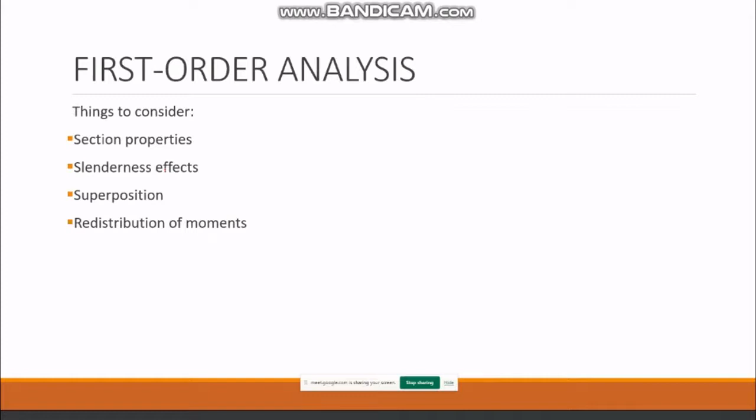We have okay, sama na itong target. Okay, so ayan, so last time... Okay, stop ko muna ako presentation.

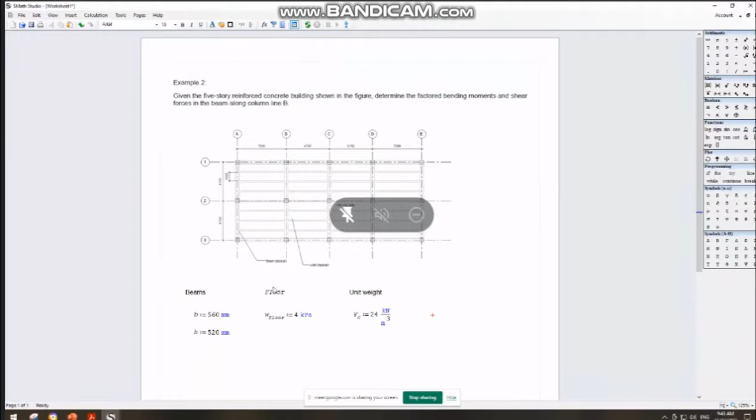So our beams are 560 by 520. While ang atong floor, ang atong kinahanglan information is actually the weight of the floor, which is 4 kPa. So ito yung kailangan natin. Okay, so then we are using normal weight concrete nga 24 kilonewton per cubic meter. So we are to determine the factor bending moments and shear forces in the beam along column B. So take note, kini lang atong kina-consider.

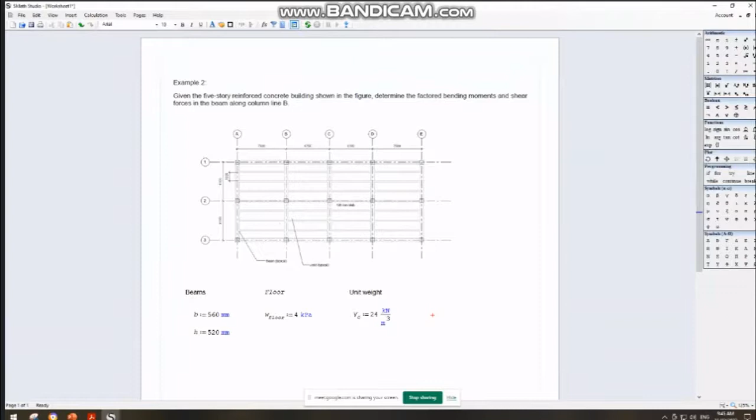Okay, sige. So let's start with our solution. So usually pag ganito, pag simple lang, we can expect that the dead loads and live loads is uniform all throughout the span. Uniform talaga ni siya.

So the tributary width is supported by the beams along line B. Equal to 1/2 of the transverse span in either side of the column. So 1/2. So dire 1/2 ani and 1/2 ani. So in other words, there is atong slide, ang atong tributary area is...

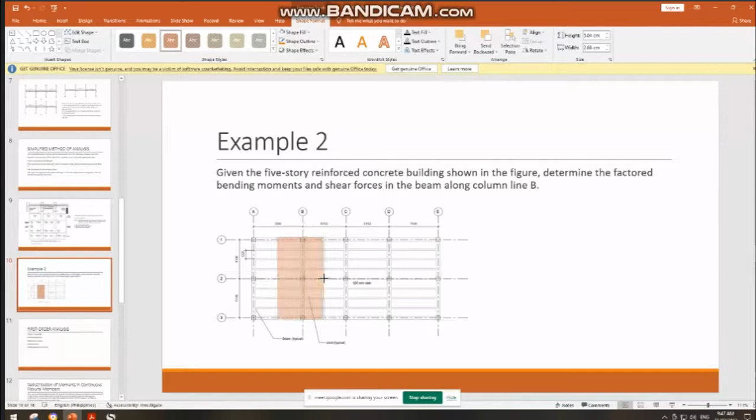Let's say shape. Ang tributary area ni mo ingon. Let's say transparent na ta. Ito yung tributary area nimo. So this side here, 7,600 divided by 2. There, this is 6,700 divided by 2. So ang tibok ani nga length would be 7,600 divided by 2 plus 6,700 divided by 2. So that would be our, so 1/2 ani dire, then 1/2 dire. So let's compute.

Ang atong first method is we have to calculate the tributary area. So calculate kita sa tributary area. Calculate... so inside of tributary area, usually pag beam, tributary width lang. So tributary width. So again, 1/2 ani is 7,600 or 7.6 meter. Then this one is 6.7.

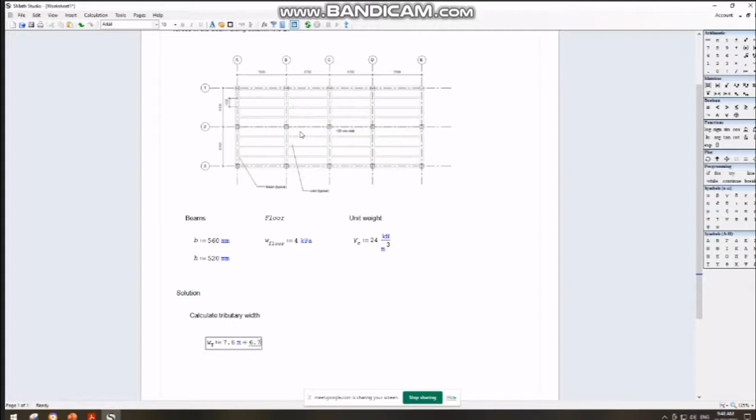Okay, 1/2 ani. Then 1/2 ani. So 7,600 divided by 2 plus 6,700 divided by 2. Or that would be, let's say, tributary width. Let's say I'm using WT for my tributary width. So that would be, ang first pa natin, 7,600 or 7.6 meters. And plus 6,700 will be 6.7 meters. Tapos, i-divide na natin sila tanan by 2. Oh, by 2, then that would be, okay, we have 7.15 meters. Okay, so we have already determined the tributary width.

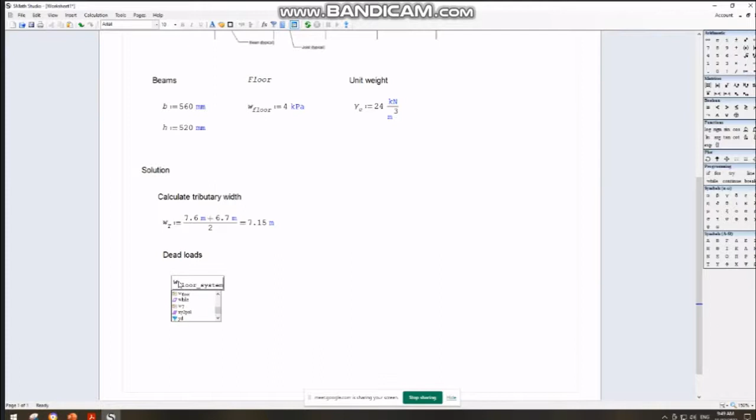So the next step, we can now calculate the dead load. So calculate the dead loads. Okay, so first, consider natin ang atong weight of joist. Okay, so let's say na lang W, let's say joist. This is actually including na yung so let's say weight of floor na lang, floor system. That's combination of the combination of your joist as well as your slab, no? That will be equivalent to the weight of the floor.

So in combination now, joist, the weight of the joist as well as the slab, that would be the weight of floor, 4 kPa multiplied by the tributary width, 7.15, WT. That will give us the weight of the floor system in terms of kilonewton per meter, per meter length. Usually pag beam, we express that one in per meter length. So i-convert ko lang niya to kilonewton per meter. We have 28.6 para sa atong weight of the floor system in kilonewton per meter.

Next, so floor system na lang ni. Floor system, let's say floor system, it consists of joist and slab. Next, we have the beams. Beam pa.

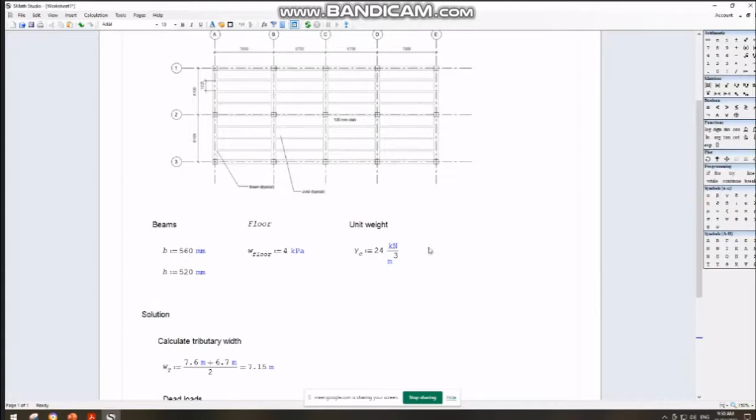So for beams, again, we're not given the weight of the beam, but instead we're given the dimension, and we know that our beam uses a unit weight of 24 kilonewton per cubic meter. So to determine the weight of the beam, let's call it W beam. That would be the unit weight of concrete, 24 per cubic meter, multiplied by the dimension, which is B times H.

The cross section B. And to get the same rate in kilonewton per meter, we have to convert this. So we have 6.988 kilonewton per meter.

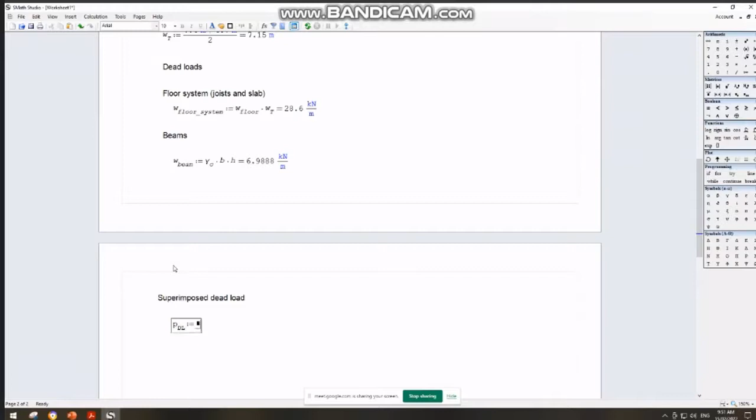The pressure for the superimposed dead load is called PDL, pressure and superimposed dead load, that is 0.5 kPa.

So we also call this W SDL, superimposed dead load. That would be equivalent to the pressure for superimposed dead load in kilopascal times the tributary width, converted to kilonewton per meter so they're all consistent.

So now we have the superimposed dead load in kilonewton per meter, and therefore we can compute the total dead load. Usually the total dead load is just WDL. That would be equivalent to our weight of floor system, plus our weight of beam, plus our weight of superimposed dead load.

That means it's equivalent to 28.6 plus 6.998, plus 3.57. So we can just compute that directly. So we have the value in kilonewton per meter. So for our dead load, our total dead load is 39.1638 kilonewton per meter.

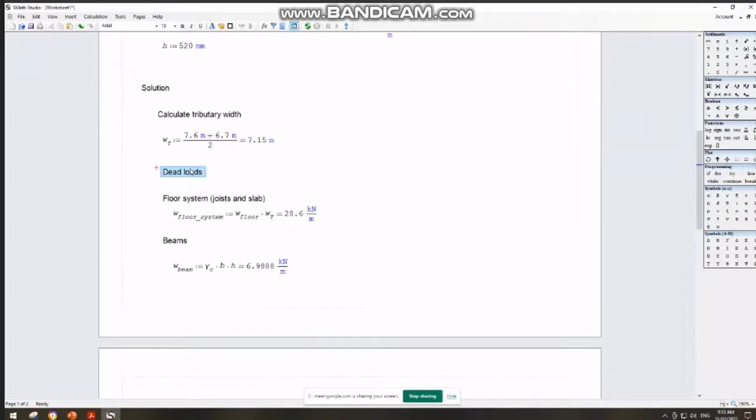Next, let's compute our live load. We're done with the dead load, now let's do the live load. What do we need the live load for? Of course, so we can compute WU, which is a requirement later on.

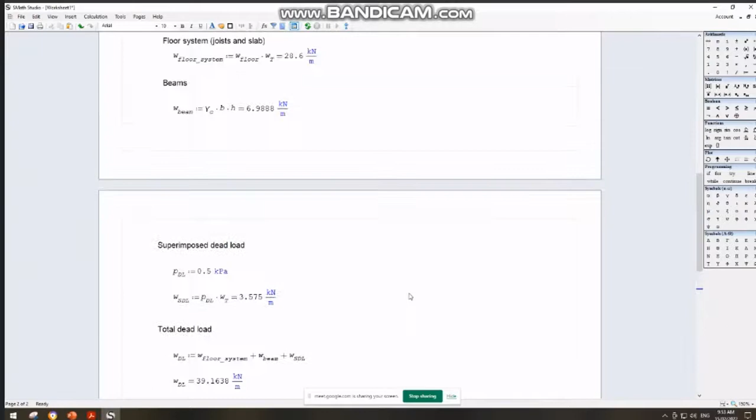Since it's a floor, and a typical floor, we have to apply the live load reduction. So, reduce live load, or apply live load reduction.

So for floors, the formula we use is on our slide, which is equivalent to L. We have L sub O, the nominal live load found in the code. So we'll be using the metric formula, 4.57 divided by the square root of KLL times the tributary area.

Now according to the code, in our previous example, our value for KLL is 4. This time, since it's different, the value would be KLL is equal to 2. So that's the value for beams.

Next, let's calculate this one. For office use, based on our previous example, for office this is equivalent to 2.9 kPa. This is found in the code, coming from NSCP 2015.

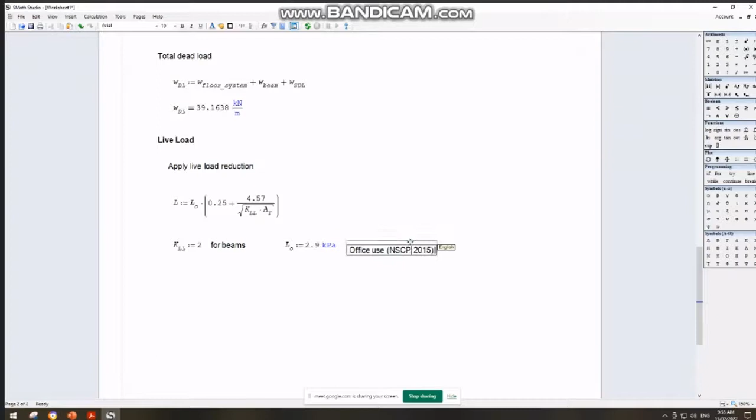Next, we need to compute our A sub T, which should have no unit. So again, since our tributary width, let's go back here.

Our tributary width is 7.15. Considering the span, same as the other, this length which is 7.15 times this length of 6.1 would give us the tributary area. So for the beam, for one beam, we get the tributary area first, width times the height. So this one is 7.15 total, times 6.1.

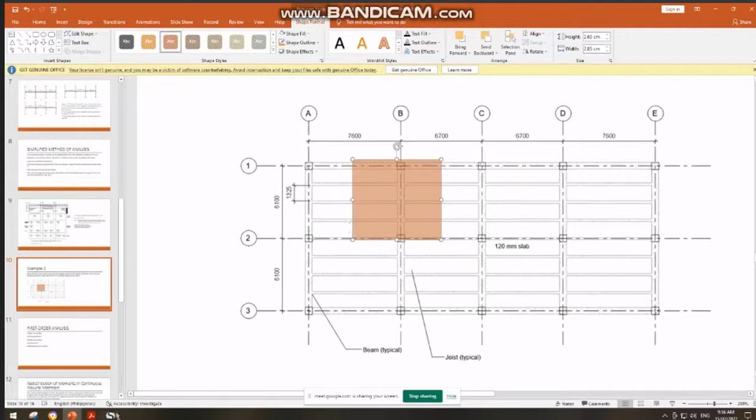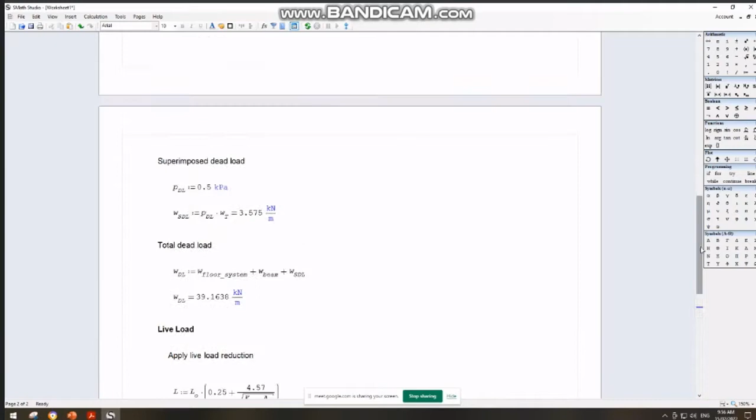A sub T is equivalent to our tributary width times this value. We don't use WT because it has a unit, and our formula requires no unit. So we just use the value, which is 7.15 times 6.1, removing the unit so the formula and the answer are consistent.

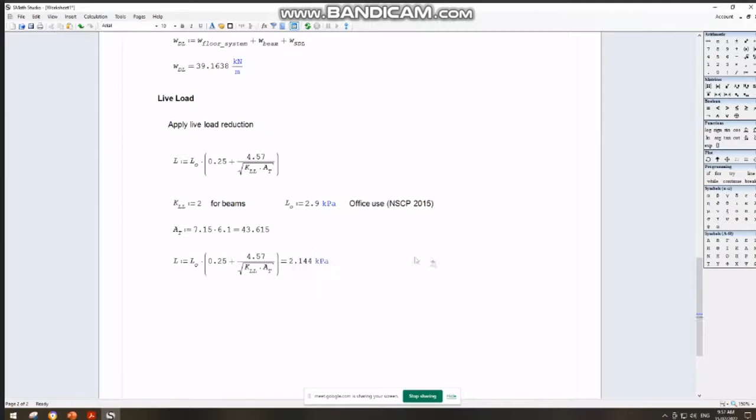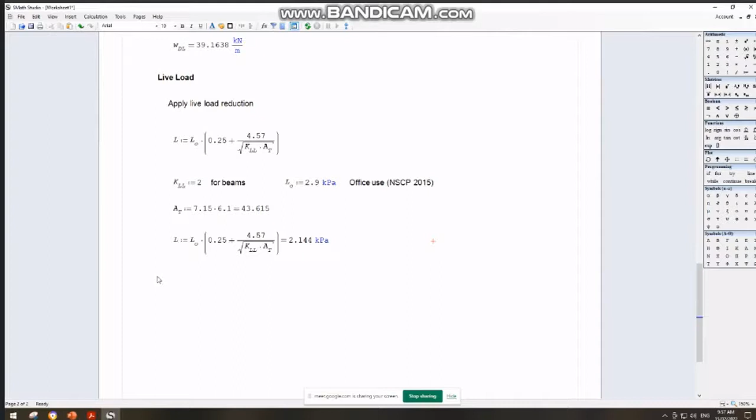So let's compute. We have it in Pascal, let's convert to kilopascal. We get 2.144. But there's also a consideration in our code: if it's supporting 2 floors, use 0.4, and if supporting 1 floor, use 0.5. So let's call this one L1, and we have to compare it with L2. If supporting one floor, our code condition is 50%, so we have 0.5 times L sub O.

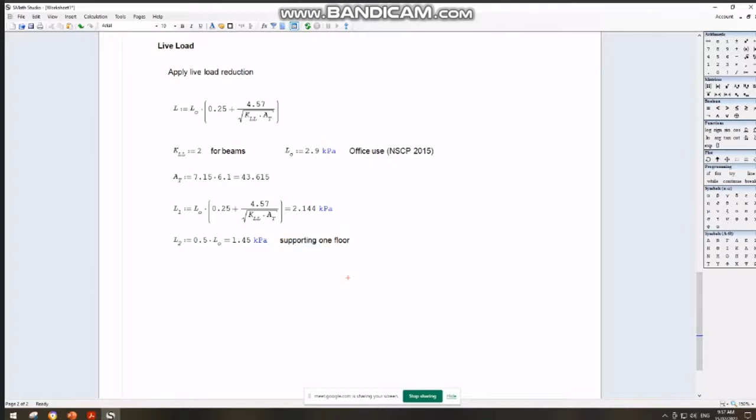kPa, right? This is supporting one floor, no? So I'll assign it as whichever is smaller, okay, whichever is larger among these.

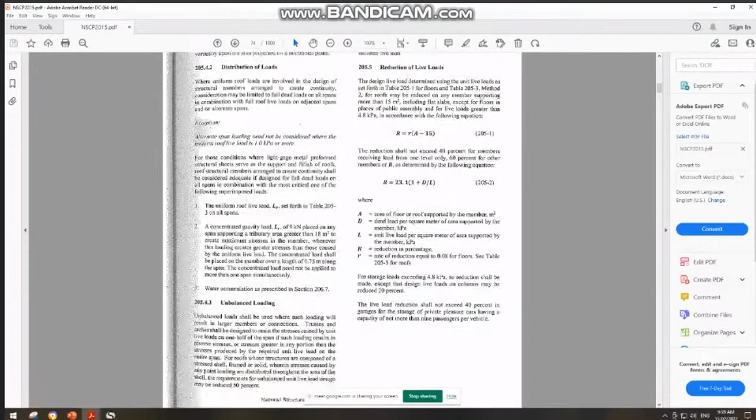Let's go to the code, NSCP. Okay, so we have here the code. Let's find the provision, around here... 40.

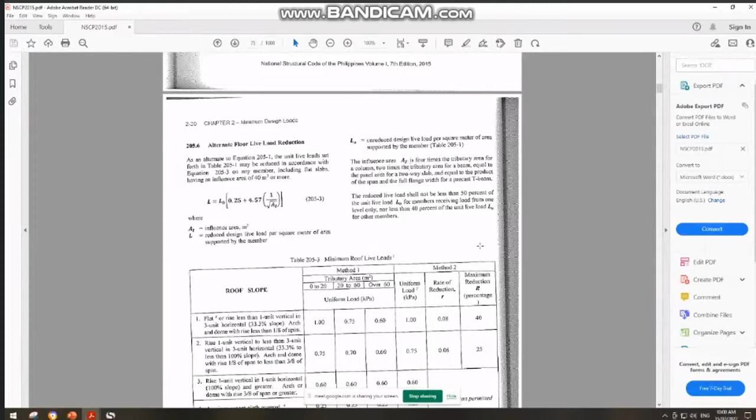Okay, this one: the reduced live load shall not be less than 50% of the unit live load for members receiving load from one level only, nor less than 40%. In other words, whichever is larger. So it should not be less than 50%. Since this one is larger, then we'll be using L1 as our L.

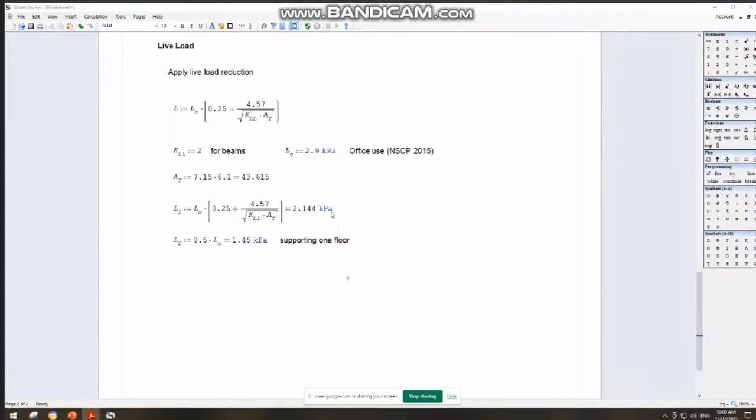Okay, so this would be the reduced live load. Or you can use the program for this. Let's say our reduced live load is equivalent to, using this command: if L1 is less than L2, whichever is larger, then L equals L2, else L equals L1. Since our L1 is greater than L2, our L here would be 2.144.

Okay, so this would be our reduced live load. Of course, we need to include also the partition load, movable partition. We cannot really, usually for offices we have cubicles, right? We put in cubicles, but they are not permanent, they are movable, so we have to include movable partition load.

Usually, what's used for this, according to the code, is 1 kPa. According to the code, for movable partition, we have to use a value of 1 kPa. So therefore, our live load now would be the reduced live load plus 1 kPa for the movable partition, then you have to multiply that with the tributary width.

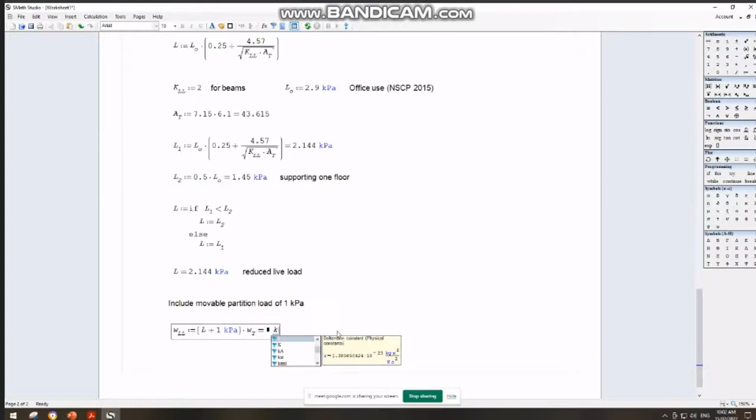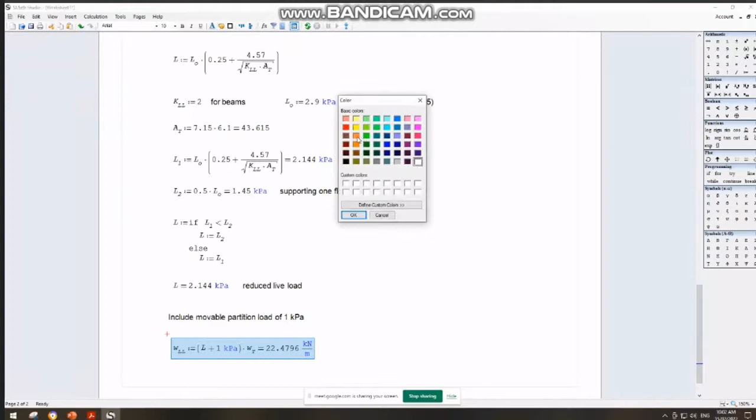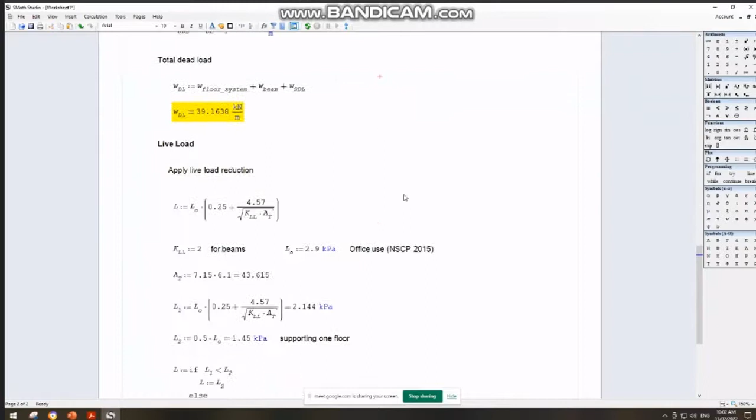Okay, you have now the live load in kilonewton per meter. So we now have the live load and we also have the dead load. These are the important values we'll be using later on. Next, having determined now the dead load and the live load,

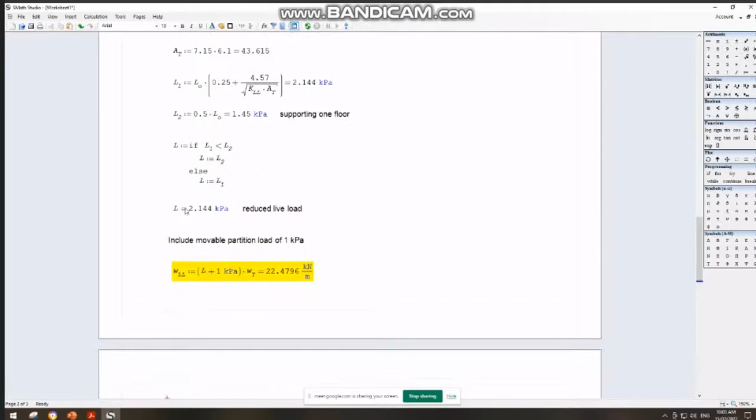so now that we've determined these, the next step is we are going to verify whether we can apply the simplified method. Can we apply it? That would be our... so it's a long process, as you can see, we haven't even started yet. We just computed the dead and live load.

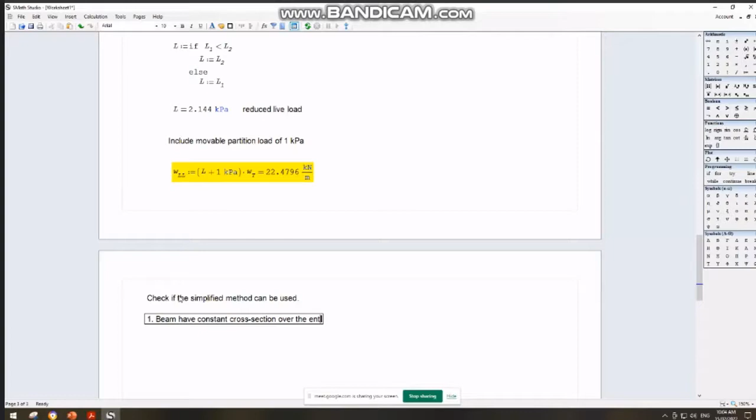members are prismatic, they have uniform cross section. So since our beam is rectangular and constant, then it's okay. Beam have constant cross section over the entire length. Actually, the length of our beam here is 560 by 520, so our beam is 560 by 520, so it's constant.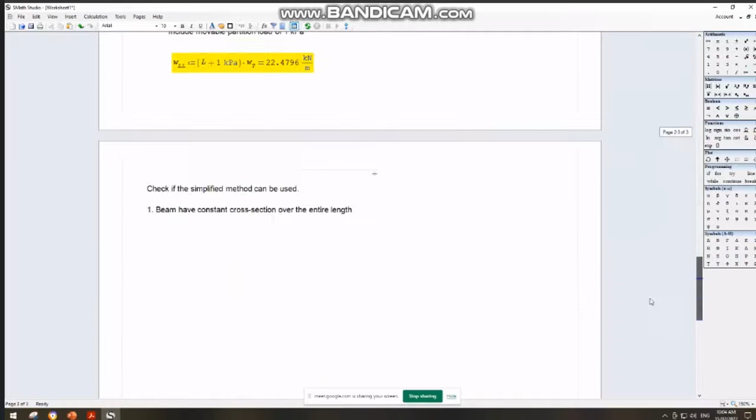Number 2, our load is uniformly distributed, rectangular, so it's okay. So for number 2, our loads are uniformly distributed, rectangular load. Okay, one-way slab. For two-way, it's trapezoidal, but this one is one-way slab, so loads are uniformly distributed.

Then number 3, another reason we computed this. The number 3 requirement is the unfactored service live load does not exceed 3 times the unfactored service dead load. So for that reason, compute the unfactored live load, LL.

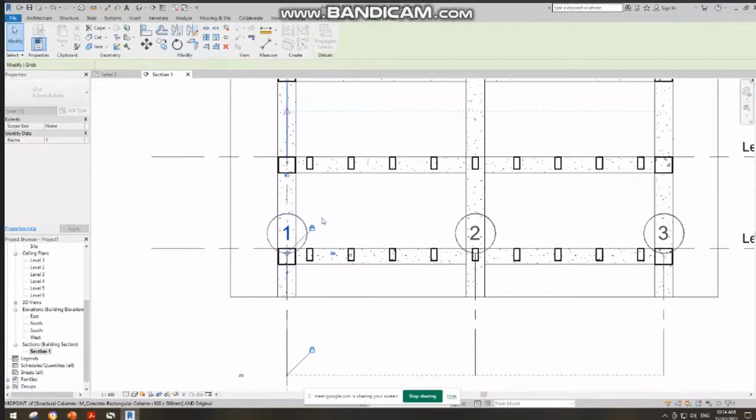Loading up computer.

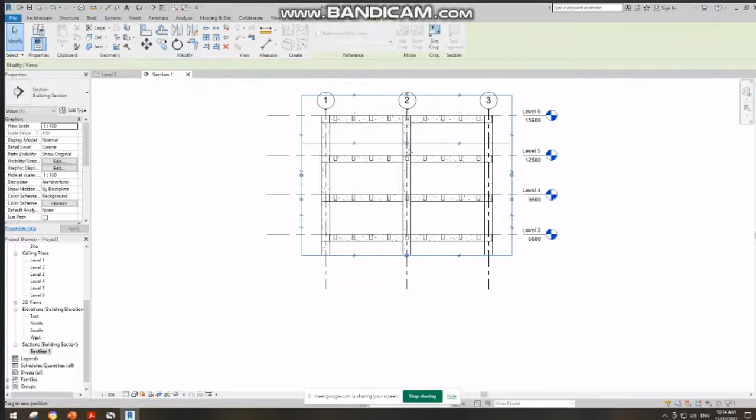Okay, so isolate ko lang so that kailangan po ng level lang ako i-consider. Okay, so ano siya. Then, let's go back here.

Section, wala yung section view po. What happened to my section view? Level 2. Okay, so wala. Nawala ako section view. Okay.

Okay, so pwede. Okay, dito na yun. Dito mo yung section view na ako. Nawala. Delete mo na. Okay. Kahit ko na doon section, nawala ako section view.

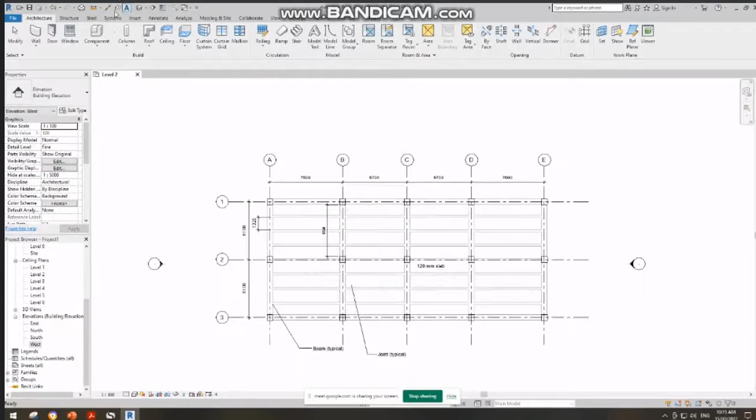And para wala tong bin makita. Oh. Okay, mumove ko ni siya by this. And let's have the section views. Okay.

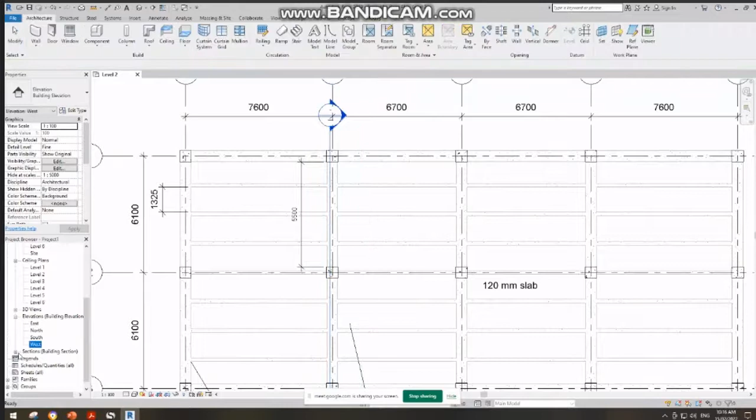Para much better. Let's say for a typical floor, no? Okay. Mamaya ito kailangan, no? Okay, so kung yung butangan o dimension. Okay. We have, no? Ayan.

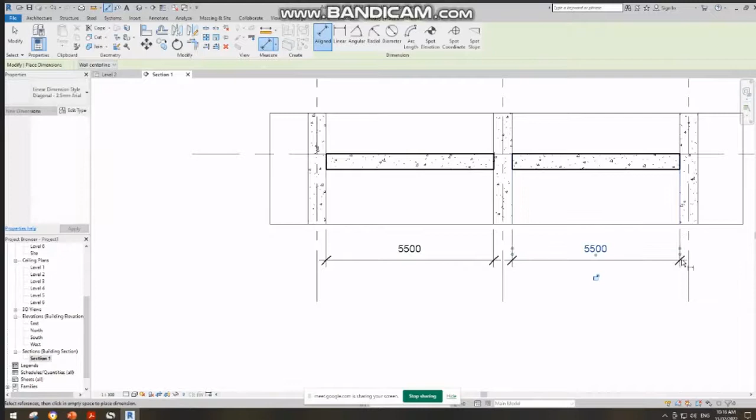So ato i-consider, consider natin, no? Typical floor. Okay? So dire, no? Based sa itong slide natin. Okay? So we have to identify, no? Ano ba ito dire, no?

Pila ba ang moment dire? Okay? So identify natin ano saan na siya. So based dire sa itong characteristic. Okay? So ano ba nga gamitin natin, no?

Okay? So dire, no, at integral support, no? Based on this. Ano ba ito, no? So this one is actually integral na siya with the beams, no? Monolithic na siya. So therefore, ang atong gamiton dire nga moment, no?

At this point, we'll be using this one. Column support para dire, no? Okay? So let's say, muna dire, no? So in other words, the moment here would be, okay, kuya ito butangan ng gano'n.

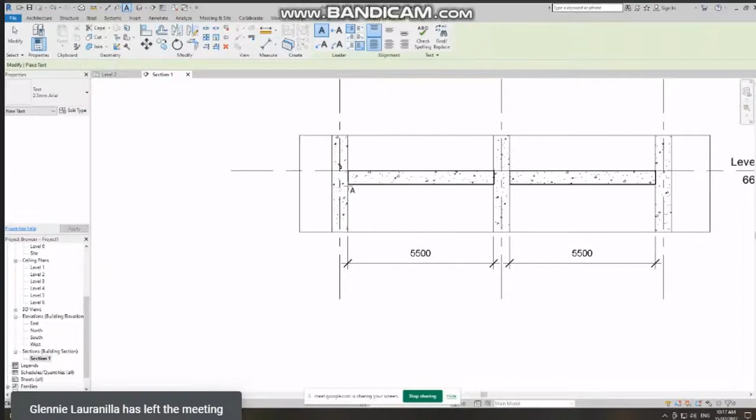Ang atong value dire would be WLn squared, no? Let's say muna ito dire nga moment, let's say MA na lang ni siya, no? Let's call this one as MA. Okay, okay, this one is MA.

MA, no? The problem is wala siya, mali siya subscript pala. Call that one as MA. Okay, by the way, puya tubutang description. This is, wala na, description na lang. Another description. This is actually the

integral, no? This is the integral based on this, mo siya, no? Integral with support, no? Ano siya? Or let's just place na lang the value, no? The value is equivalent to WU,

then that would be LN, then next natin. Okay? Then, ay, wala siya, i-divide pala, no? So WU, L, N, tapos squared, no?

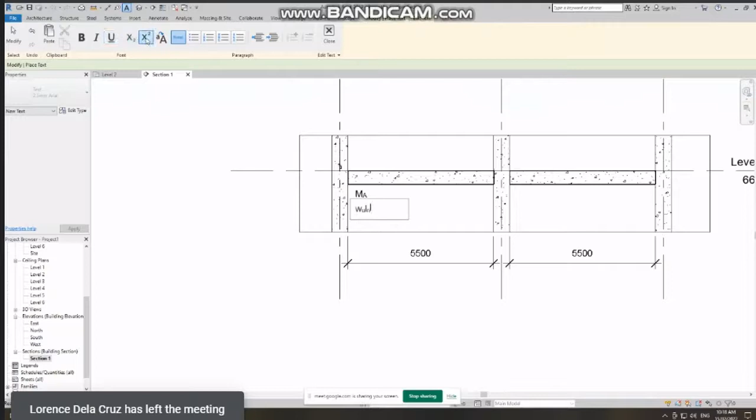And underline na lang natin siya, or pwede siya, pwede, divide by 16. Okay? So ano ba yun dire, no? Okay, so ayan, identify natin which value to use. Ito maglisod.

Okay. What about dire sa ito nga at mid-span, no? At mid-span, based on this, no? That is WLn, no, squared over 14, no?

Dili kini siya dapat naa pa sa duha ka extra mid-span. Napay duha ka span, but this time duha ra man siya ka span, then we'll be using the WLn squared over 14, no? So dire.

So kapihon na lang naton para sa mid-span naton. Then this is equivalent to 14, no? Balik. Okay. Okay, kini kapihon ko na liwat, no? Copy.

There, and this is, let's say, B. And kini, pwede kapihon ko na lang sad. Let's say I'll call this one as B.

Okay. Apply value dire, no? Okay. So therefore, the value dire, no? Tanaw natin dire, no? What would be the value? Okay. So ano bang value natin?

Okay, so this is actually based on that, no? This is the integral face, no, for the exterior face, no? The exterior face of the first interior support, no? So therefore, no, beginning, no? This is the value. Okay?

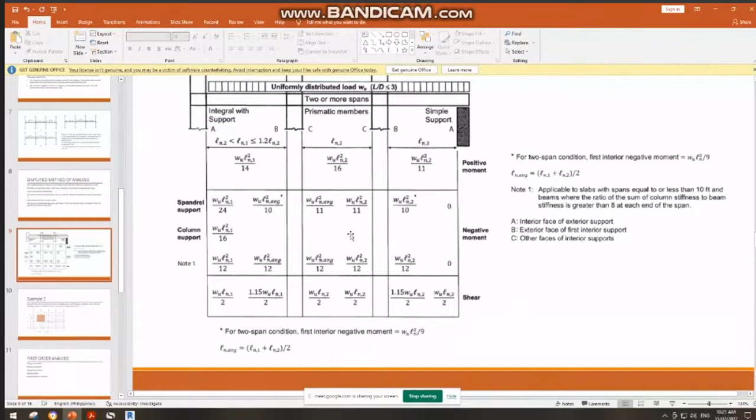Okay, pwede po ka mo gamit og note, no? But then, kailan nato gamiton, no? Let's say. Okay. Parang kulang ini, 2 or more span.

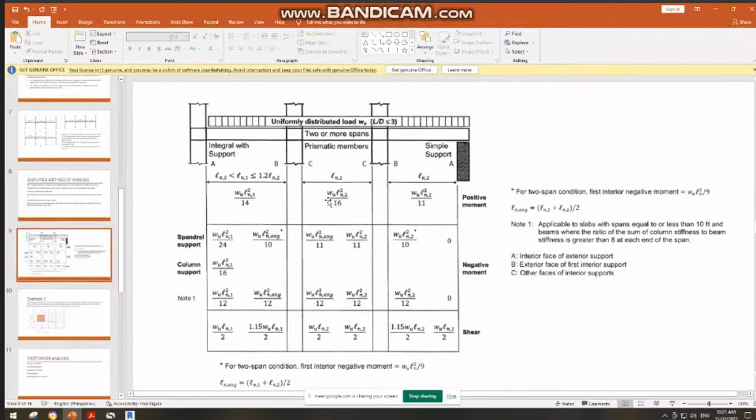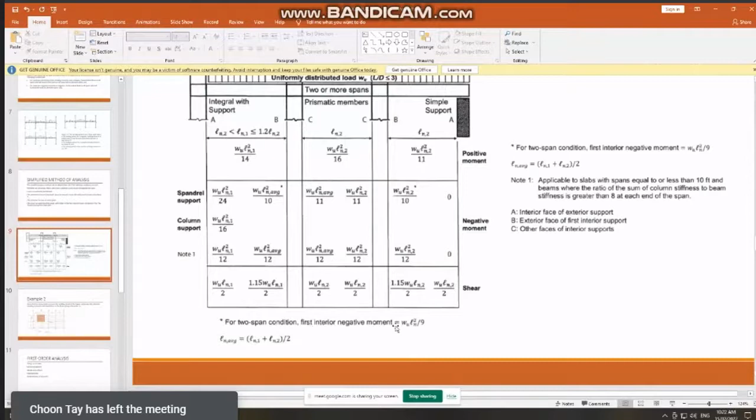14, sakto ng 16. So this one is for kung spandrel, but kung wala, so yan, yeah. For 2 span condition, first interior negative moment, ito, no? Can you see, this is for spandrel. But kung di siya spandrel, since di naman spandrel, integral support naman, then we'll be using this one. W ln squared over 9.

So, kulang man, wala din rin. Yan, so that would be the value. So okay, no? So this value, no, ang atong gagamitan.

Okay, so ito nga value. Using na ito. Okay, so let's go back to our Revit. Sabihan ko na rin eh. And then, i-edit na natin.

And this is equivalent to, again, 9. Okay, ito para sa shear.

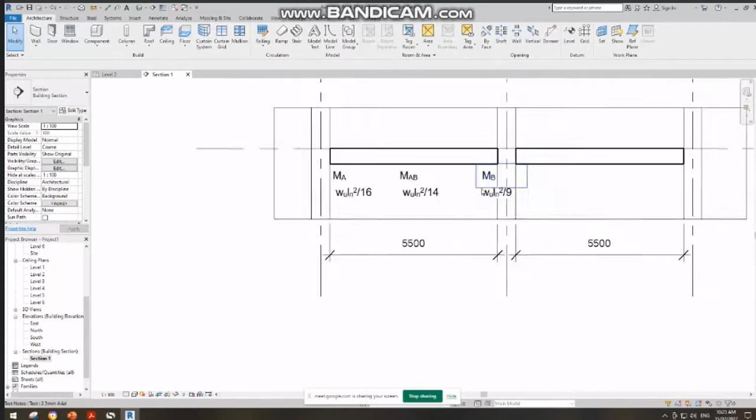So, tayo shear. Ang next na lang natin is para sa moment. We're done with the moment. Next na lang. So, atin, parehas lang diri. Whatever ang nadiri, since symmetrical man siya, the value would be the same. So, parehas lang nadiri.

Okay, so mirror lang. Whatever ang value diri would be the same on the sides. Kaya lang, gini siya. So, mirror lang. I-mirror lang natin value.

Okay, so let's go to the shear. Okay, so ang shear na to, again, is okay, what will be the shear? So, kani, no? So, this would be the shear natin. Okay, so for this one, we have W ln over 2. Okay? So, mahirap ba yun rin?

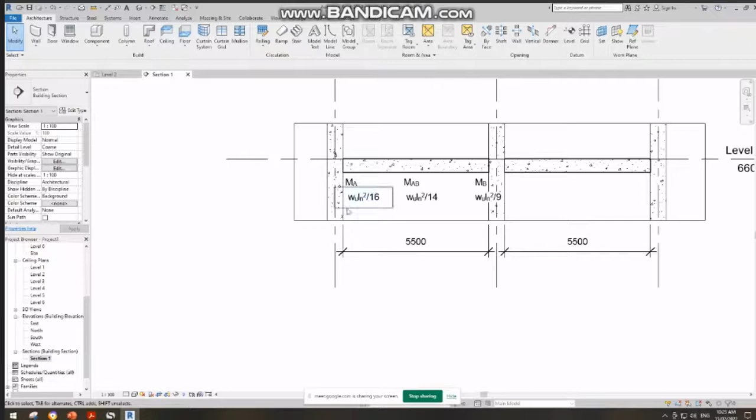Okay, go back. Our shear, no? So, again, ihan ko na rin eh. Let's go with shear. So, pwede pa natin i-drag po, boss, para medyo to give more space. Ayan lang, pangit.

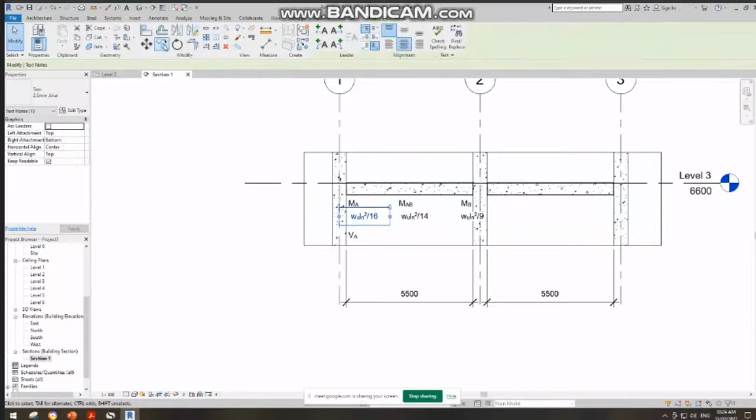Okay, so the value is, pwede akong kapihon na lang eh. Okay, and then, i-edit ko na lahat. This is equivalent to WU LN over 2.

Then, wala tayo share sa center since usually, ang moment ani usually, pag nilihim mo tag-shear diagram, if you consider, kung nakailog niya yung unani, uniform distributed, ang shear diagram, unani. So, 0 ang atong share, natin share doon sa A, share sa B. Usually, ang atong share there is 0.

So, therefore, wala tayo share sa ito nga. Ang naalang natin sa end. So, kini ang sa first end, then ang second end dire. So, this would be 1.15 W ln over 2. Dari.

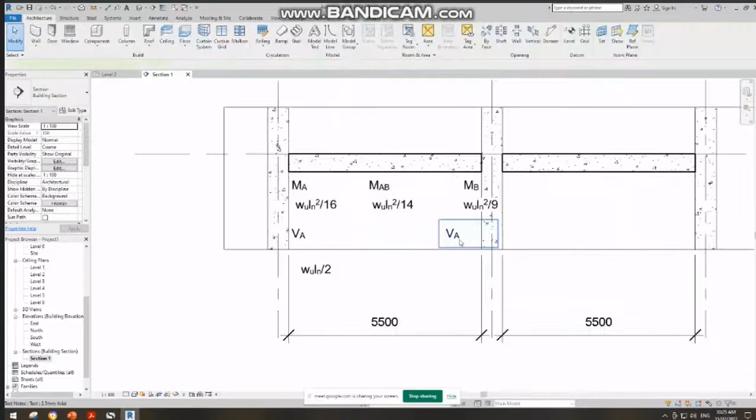Let's say. Ati ko lang ni. Let's say shear at B. Then the value would be, pwede ko lang kopyahan. Kaya ni-edit ko na lang. Equivalent to 1.15 W ln over 2. Okay na.

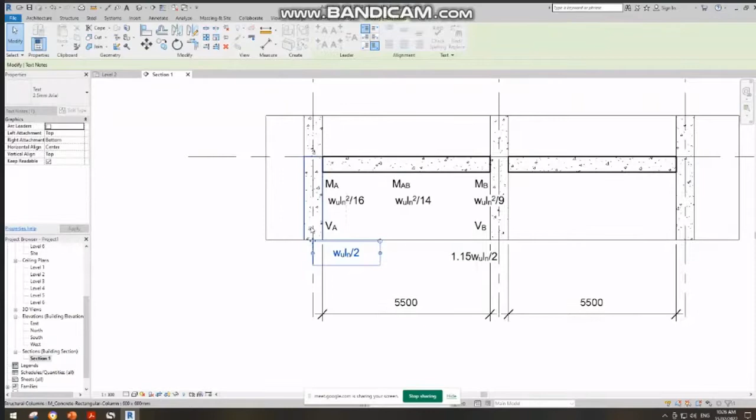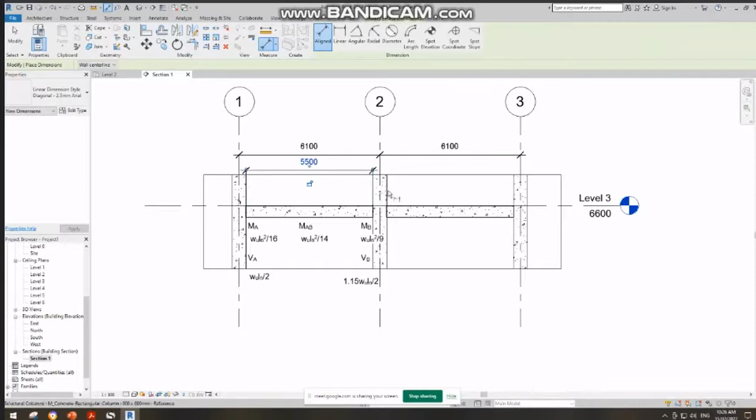Okay. So natay values, therefore pwede tayo mag-solve. Okay na. No? Ayan. So we have now the values. Pwede na. Pwede natin butang sa taas na lang ni para medyo ano, much better yung kanapos. Ay, yung center man ako na ano. Center to center, then of course, pwede po taog.

So that's then. Okay, so kuya natin ibutang dito sa atong ano. Ini kuya natin i-hide na lang natin ni. Ayan, magmuha. Okay, so ako na lang na siya. Okay, or other. Point hindi natin consider.

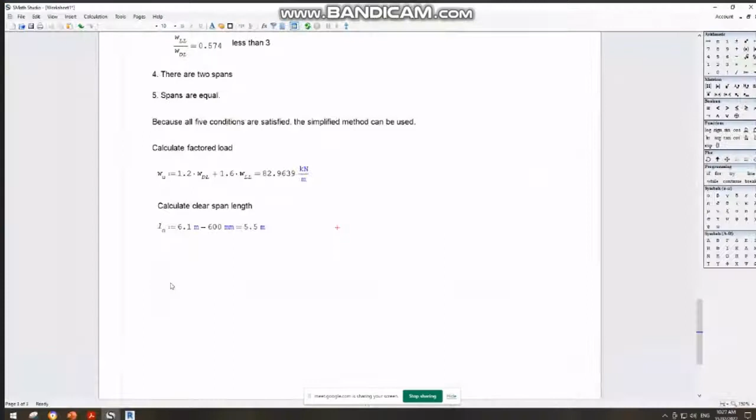Okay, ayan, we have now. So, replace na natin dito. Okay, so we have now the... Okay, so from that, we can now calculate the corresponding values. So, easy na. Okay, so here, MA na lang.

So from here, we have your MA, that's equivalent to WU times LN squared, divided by 16. Divided by 16. Okay, so convert ko lang to kilonewton per meter. We have now the moment sa atong MA.

Okay, then gusto na to midspan, let's say MAB, then ang atong midspan is WU times LN, that would be a squared hapon, but this time divided by 14. Ayan. Okay, so we have your MAB.

Then finally, karipod sa MB. Our MB is WU times LN and this is divided by 9. Okay, so compute na lang siya. Okay.

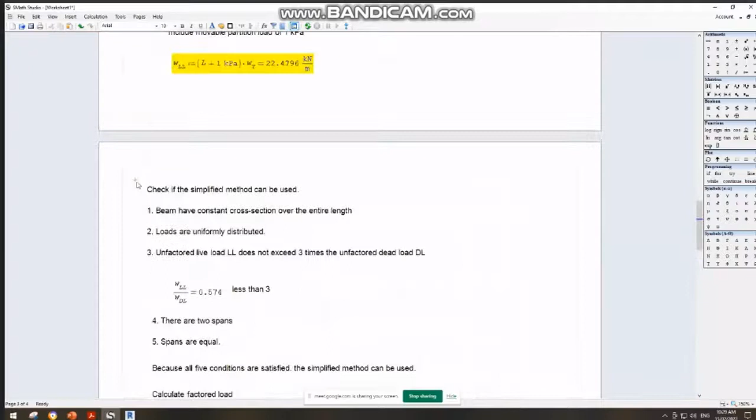And finally, shear at A. Wala na. So, much better siguro. Saka ko ni gamay. Marami dyan. Marang siya. Okay, so yan. So, this is A. Okay, based atong formula, WU and LN divided by 2. Ayan.

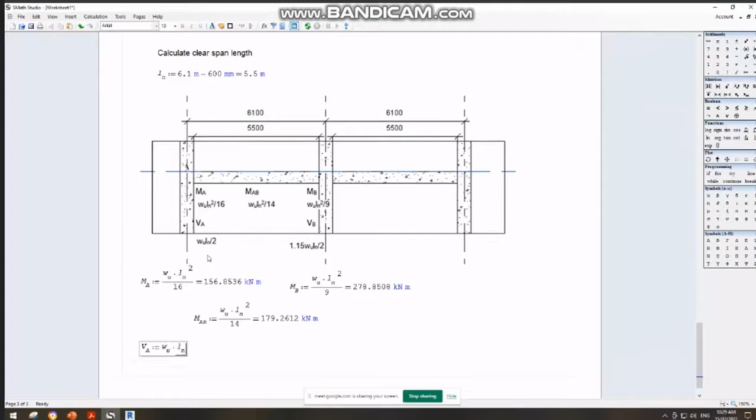Pwede yung the whole na lang. Pagkapareho sa kapag answer. Okay, so have it in kilonewton. Then, dealing aside, we have 1.15 times WU times LN divided by 2. Okay, and kilonewton. Okay, so these are the answers. So you will be using this one pag maning values ang atong ginagamit, to determine ang mga moments.

Ayan. So maning mga tinang natin gamiton. Okay. So maning ginagamit pag design na. Mario lang share. Okay na. So, we have now the values. Ayan. So, we have now the answer. So, ano siya. Okay.

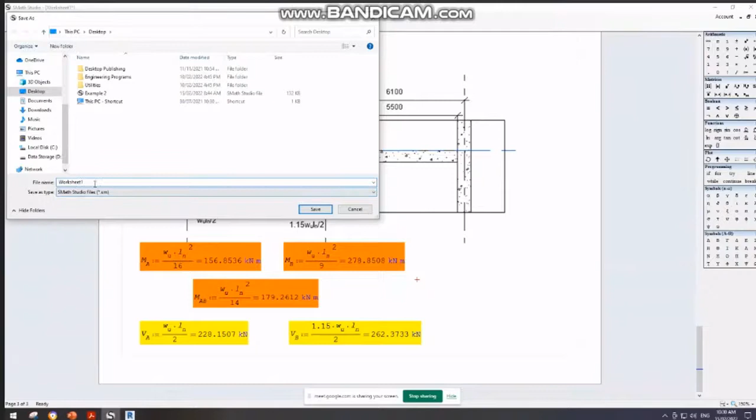Let's say na like example 2 siya. Let's say, sheet 2. So, okay. Ayan, so we have determine na, okay, that's how. So, ano ginagamit ng pag-design, so, dire, ma-design natong reinforcement. Kung pila kakabili ay butang nato dire.

Karipod, pila kabilya magamit natin diri nga end. Sa center, pila kabilya magamit. Then, pila ka stirrups. So, information needed prior to design, no? So, yan. So, kaning ato gi-discuss karon is pag-determine pa lang sa input for your design. Actually, kining mga moments, these are your input sa...